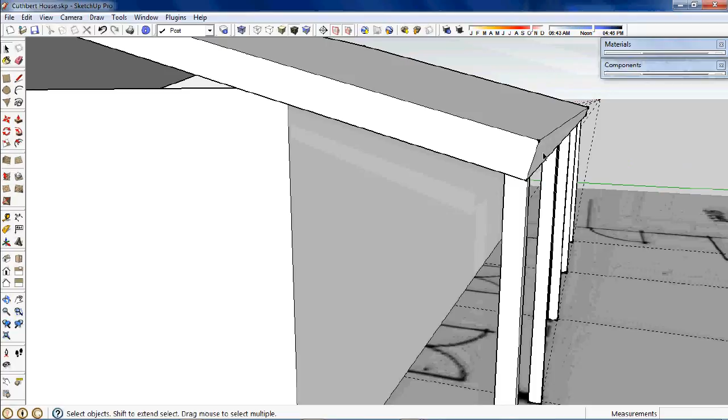Okay, so I've just noticed we need to do a little bit more tidying up on the front edge of this veranda roof here. I didn't plumb the fascia gutter line up, so we'll work that out. There's always another way of doing that a little bit later and tidying it up.

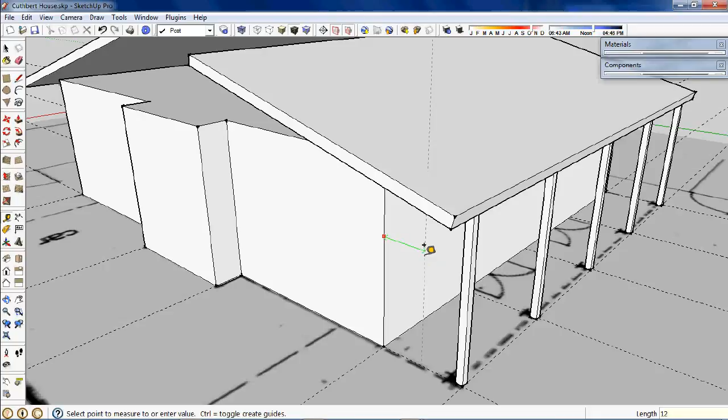Probably the way I'll do that initially is I'll go and grab my tape measure tool and come from this front edge of the house, pull away, making sure you're rubber banding in the green direction. Our roof overhang was 1250, so I'd type 1250 for that roof overhang to the front edge. The sideways roof overhang was 500, so I'm going to come to this side edge of the roof and pull back in that direction and type 500.

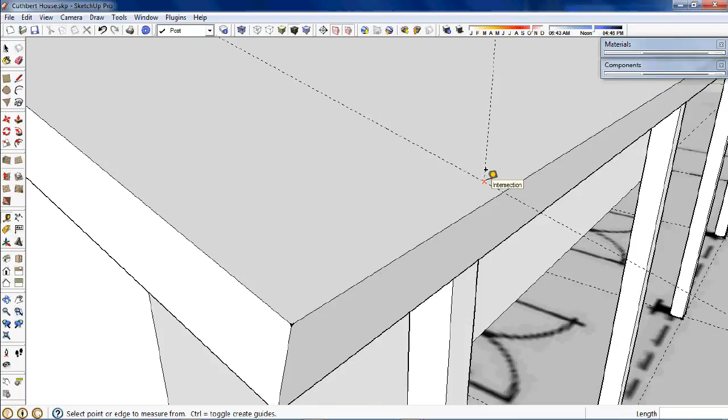That should give me some intersections to pull this edge of the roof back until it hits that intersection there. So I'm going to go and pick my select tool, pick that edge of the roof, find the move tool, pick that intersection, and move it back to that intersection of those construction lines there, and that'll plumb up that edge for the fascia gutter line.

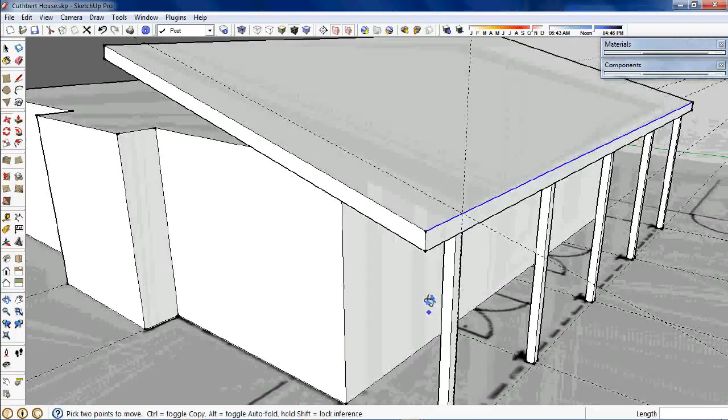I'll just go and grab my eraser tool now and clean up those construction lines as we go, and so we're set back at that point there now.

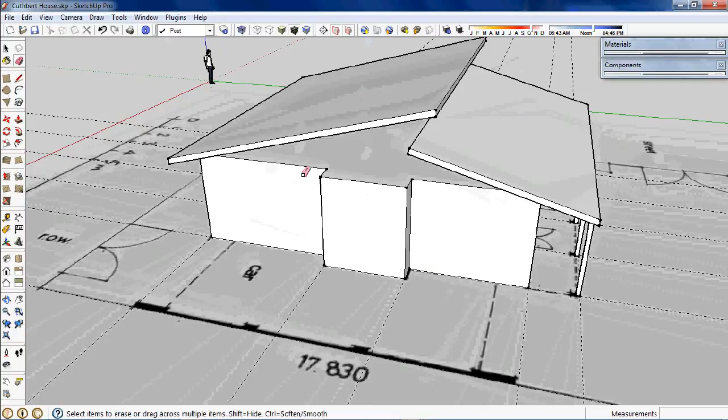Okay, so what I think I might do now is just start tidying up these walls and extending them up until they intersect with the appropriate underside of the roof planes. To start with, I'll grab my select tool, and this surface on top of the walls at the moment, you could imagine that as being the ceiling line. That's probably going to get in the road. I'll leave it there for now and see how it goes.

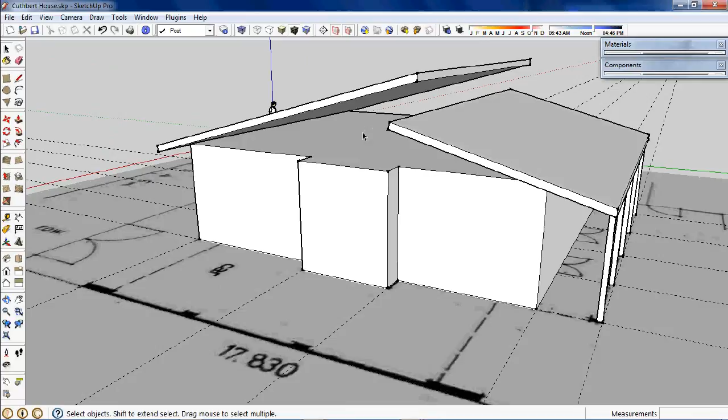Well, no, it is going to get in the road and be deleted later anyway. So just for now, I'm going to click that ceiling surface in there and delete it. While that's deleted, you can start seeing that the ceiling's disappeared, and you can actually start seeing inside the building underneath the roof there at the moment.

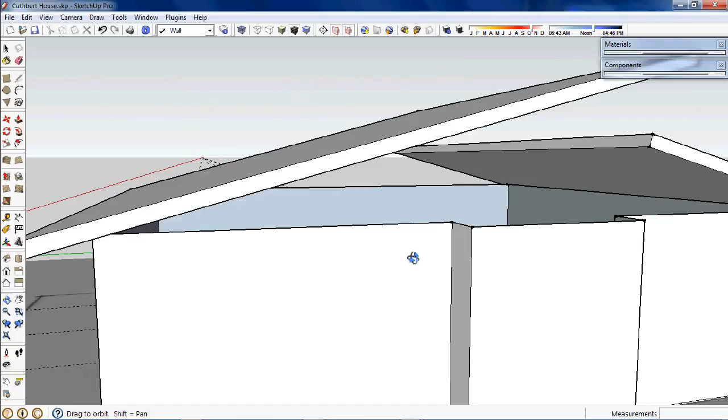But what I want to do now is drag these walls up until they hit the roof, the underside of that roof plane. To do that, I'll need to drop down my layer selector again and select the wall layer, click on the pencil tool, the line, and just orbit around to see. I want to see this edge corner of the wall and the underside of that roof.

Now if you just watch what I'm doing, I'm clicking on that endpoint to draw a line, and going in the upwards direction until I see the tooltip say 'on blue axis'. While it says on blue axis, I'm going to press and hold the shift key. That has now constrained me to only draw in the blue axis direction. Now while constrained to blue axis, I'm going to hover on the inside of the undersurface of that roof, and you'll see the tooltip now says it's constrained on the line and intersecting with the plane. Exactly what I want to do.

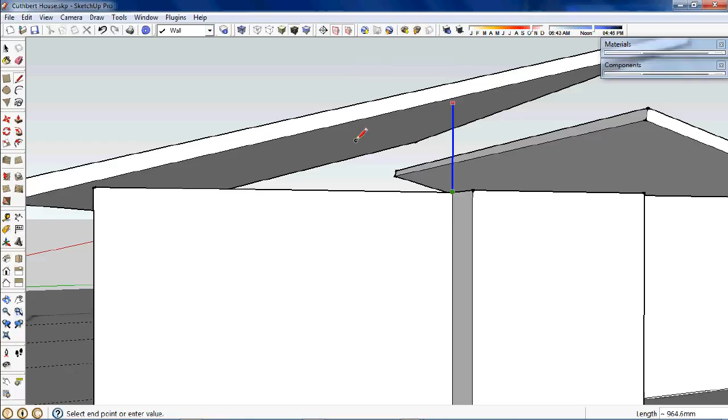So while I'm holding my shift key, I'll click there, and then the other end point of that line, while it's still rubber banding from that point, I'll click the other end point of the wall there, and I've now extended that wall up. I'll tidy that up as we go, pick up the eraser, and erase that line there that was at the top plate level, and we've cleaned up that wall to that point.

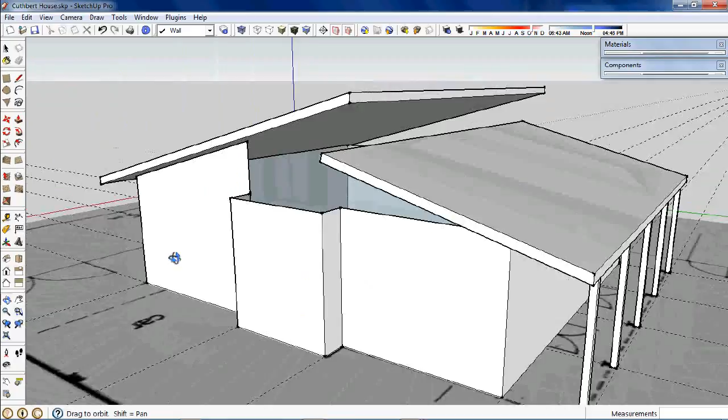So I'll show you a few more of these, and then you can keep doing the rest on your own. I'm in the wall layer, grab my pencil, take this corner point, pull it up until I see the blue axis, press and hold shift, then touch the inside underside of the roof plane and click. From there you can finish off to the other end of where that wall's got to go, to that point. Grab the eraser and tidy up there.

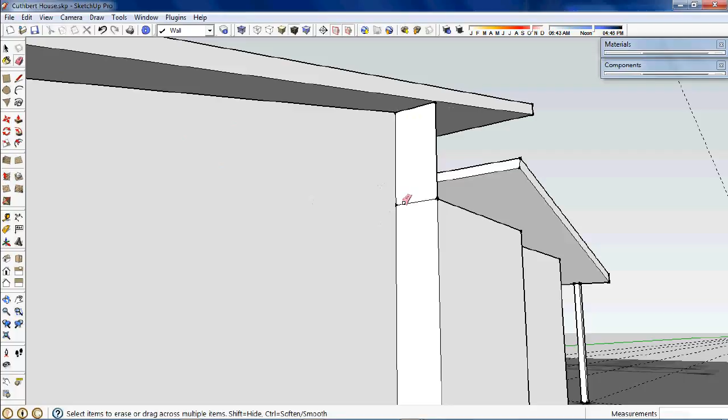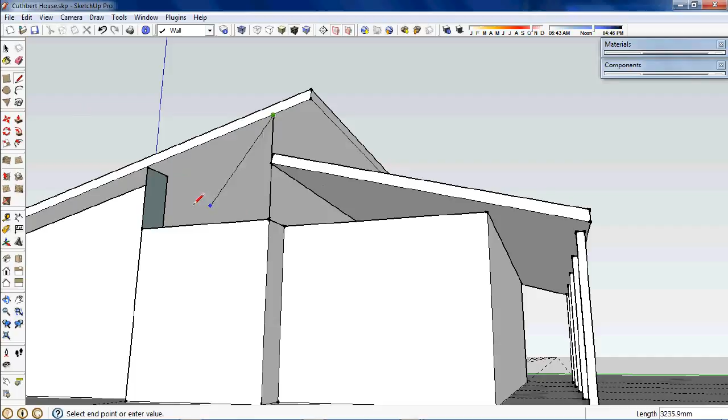Okay, I'll show you one more, and we just keep working our way around the building. Line from this point, wait till you see the blue axis, press and hold shift, then hover and touch the underside of that roof plane, and zoom right up to that other edge. You've got to be careful here, because we're not actually going to the edge of the barge fascia out here - we're actually 50 millimeters away from that. So I'm just tidying up with my eraser.

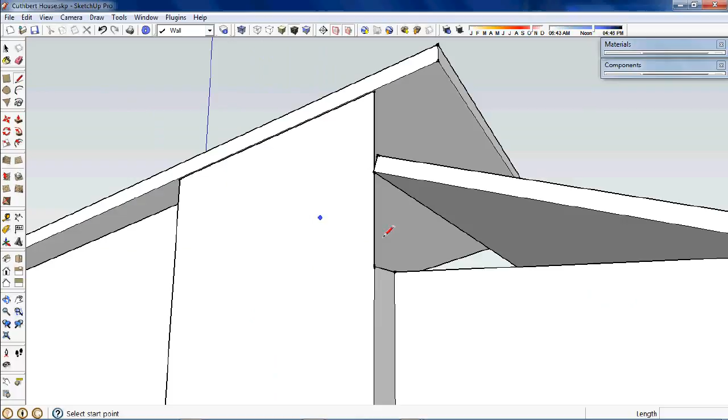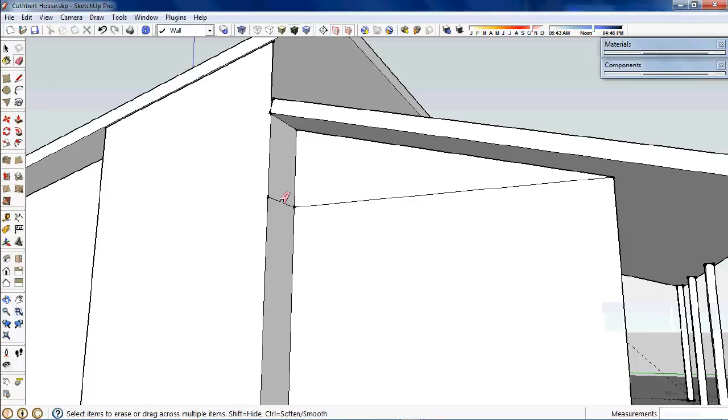The next one I suggest you do would be this one here. From that end point, on blue axis, press and hold shift, touch that underside of the roof plane. Then I've lost the end point in that command sequence, so I go back and pick the end point and grab the other end of that wall. Grab your eraser, you've got a couple here to tidy up as we go. We're just moving our way around to this one.

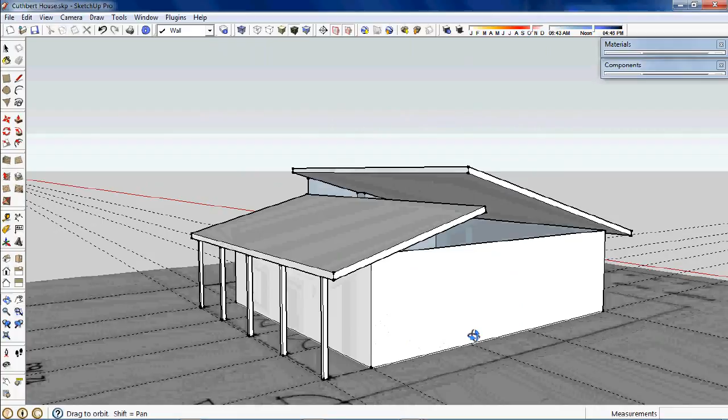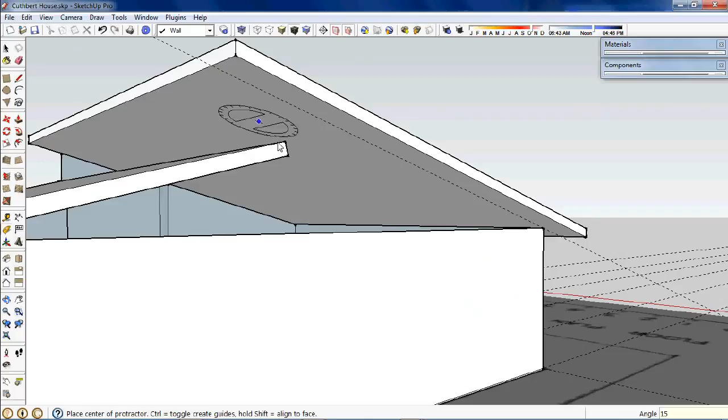Okay, what will we do for this one here? What I might do is come back to my protractor and come from this corner point and set up some construction lines temporarily. While I'm hovering on this face, I'm pressing and holding shift. I'm clicking on the endpoint, clicking along this edge to start the zero of my protractor, and then I'll hover up here and type 15 for a 15-degree roof pitch. So that's established something like that for me, just there.

I think I'll also pick up my line tool. While I'm in the wall layer, come from this far end point that we finished off on the other end of the building, the wall. Make sure your rubber band is red, constraining it to the red axis. Press and hold shift until you touch that construction line you just created, and click that there. Then the other line I'm going to finish off would be this other corner point we created, like that.

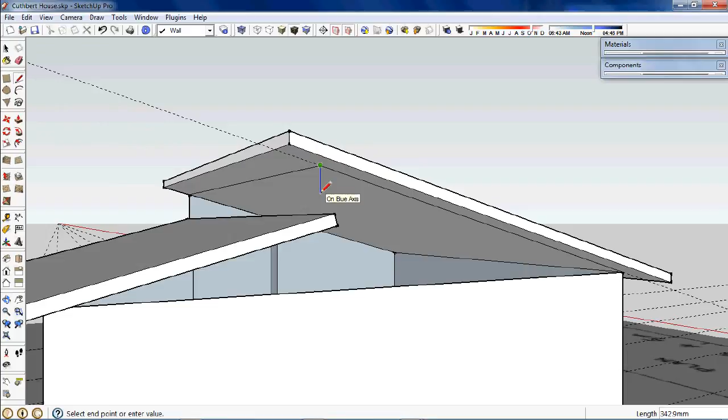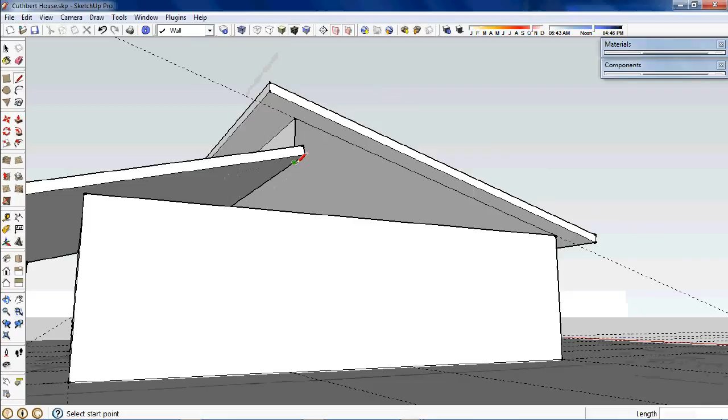I probably just need to go back to my pencil and drop something down on blue axis. I'll hover before I do, orbiting around so I can see the underside of this roof. I'm on blue axis, pressing and holding shift, on blue axis, press and hold shift and touch that underside of the roof there. So that's finished off that front roof surface for me. Then I'm coming from this end point and closing the shape off to that end point there. I'll go grab my eraser and tidy that last one up.

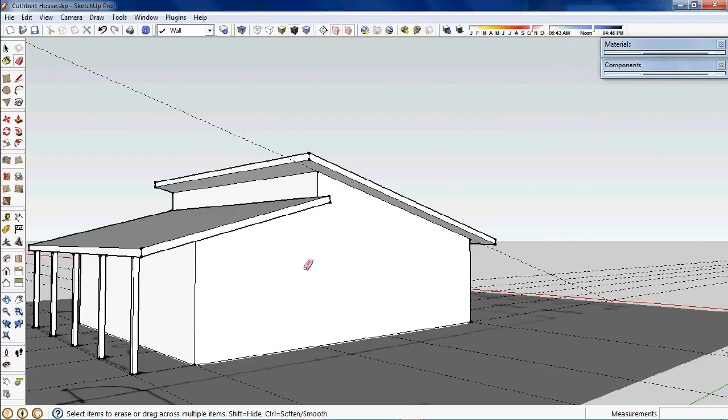So that other edge, that was a lot of what SketchUp calls inferencing, by inferring directions and then selecting other planes for it to snap to. Just tidy up that other construction line there, and we've got a nice simple model of this building starting to take shape. That's a good place to do a save, and we'll stop the video once again at that point.